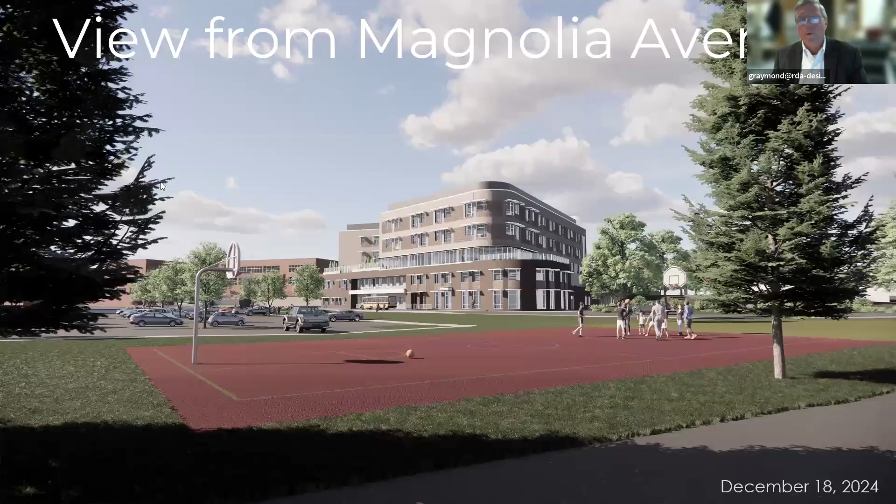What we have spent the last 6 months doing is really working very hard to finalize the design for the building, based on what we'd shown you in the past. But there's an immense amount of detailing that has to be put on paper for the bidders to price out. Since we put the drawings out for final bidding a couple weeks ago, I thought I'd just run you through where we ended up. A lot of it's picking up on what we'd gone through before, but I thought it was a good time to refresh everybody, since it's going to start coming out of the ground at some point soon.

We always start with this view from Magnolia Ave, and we have this new community amenity here that's going to be up on the street with the parking, and Sisson is back here in the background. We have a 5-story school, which we've broken down into a 2-story high community level. It's all school, but this is the double-high cafeteria that connects to the double-high gym and the main lobby. Then we have this divider, treated with transparent glass, which has the media center and the movement rooms, and around the back it has other academic rooms. What we're trying to symbolize is that we're putting a face out to the community, saying these are all important spaces. The 7th and 8th grade are up on these upper 2 floors.

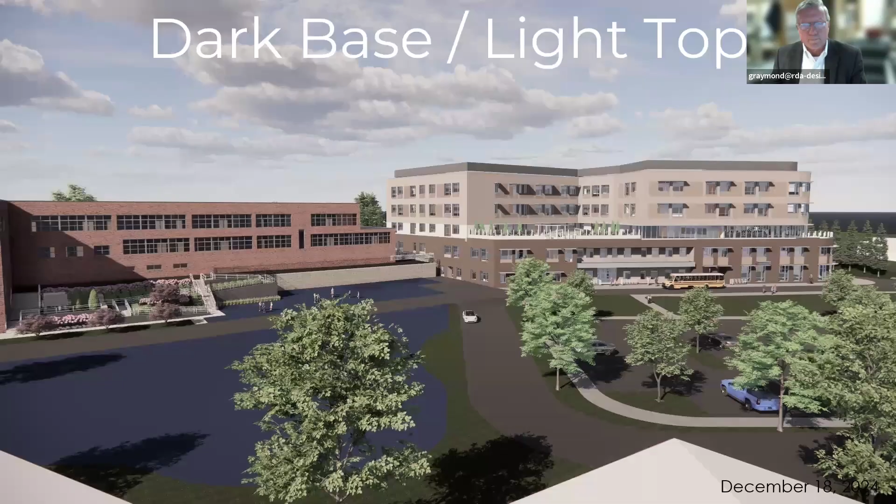We've always envisioned this, and you can't really trust the colors precisely as you're looking at them, because we'll go through and get actual brick samples. Computers are all a little bit tricky, and everyone's screen is a little bit different.

What we've always envisioned is having a solid base, like a big, nice, heavy base, and then a lighter top on it. You can see how it kind of aligns with the 2-story at Sisson, and I don't feel like it's too overwhelming, especially from this view.

You'll see later, I don't know if we've talked about it in the past, but this is where we had that media center, and they'll have a wonderful view out to Flax Pond.

Then we have those movement studios, where my cursor is circling, connected to this outdoor space we've created. We didn't have program space, we had a big roof area, so we've been talking about and labeling this the learning deck, quote unquote. There's a nice connection between the movement studio, where physical activities like dance or other learning activities can take place outdoors in good weather.

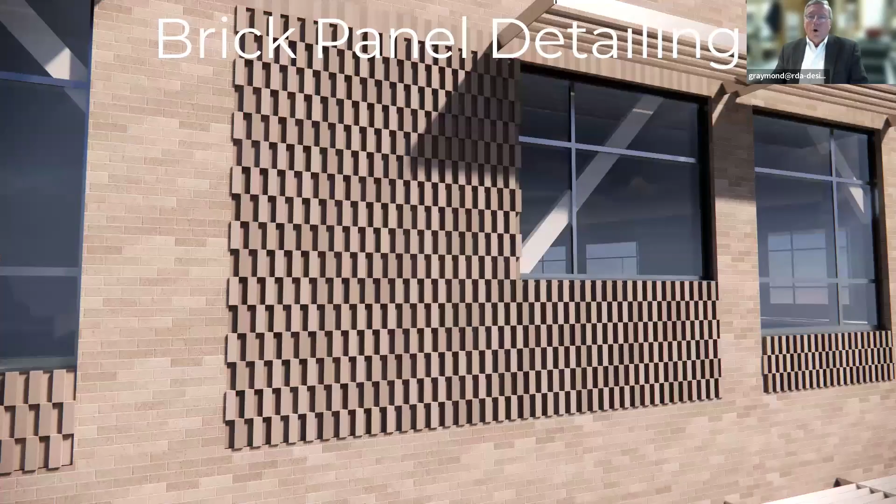I guess I'll skip back and forth, but one of the things we want to do is break down a vast expanse of brick and get some patterning. It looks very subtle here, and depending what bricks we end up selecting, which we'll go through with you, we've taken areas of the building and created some brick patterning that'll bring some shadow and some subtle breakdown.

In this slide we've shown everything the same color, but because these bricks are staggered in and out as they're stacked, there's actually shadow lines that start to appear. Even if they are the same color, it'll start to break down the facade into various panels.

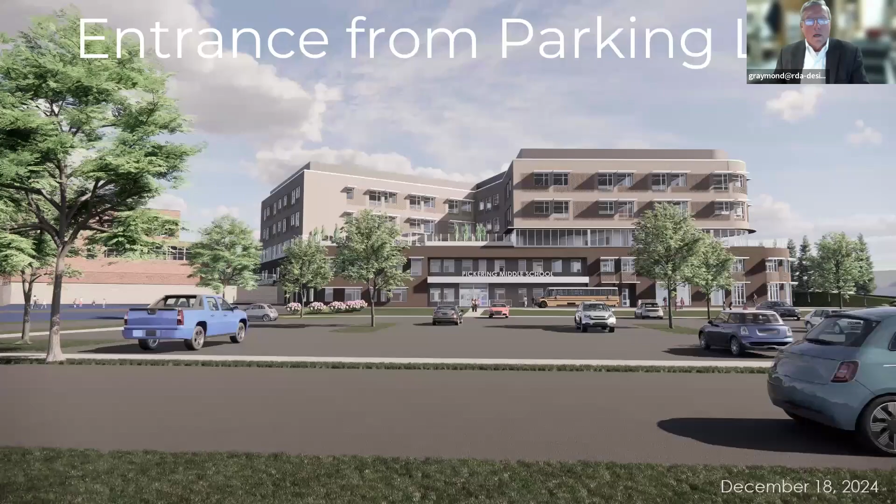Getting a little bit closer, this is the view if you went around, parked, and then the front entrance has a nice canopy that tells people where the entry is. We have some nice big lettering on the school like we do at Thurgood Marshall. In this case it's kind of freestanding, all secured obviously on top of the canopy.

With the learning deck we have some plantings, some planters, and this whole area up here is glass wind guards. The idea is that if you're outside, you're elevated up. If you're in that media center, like I said before, everyone's going to have a real nice view. These are all community spaces, not dedicated to one grade level, everyone's going to have a nice view out to or over Flax Pond.

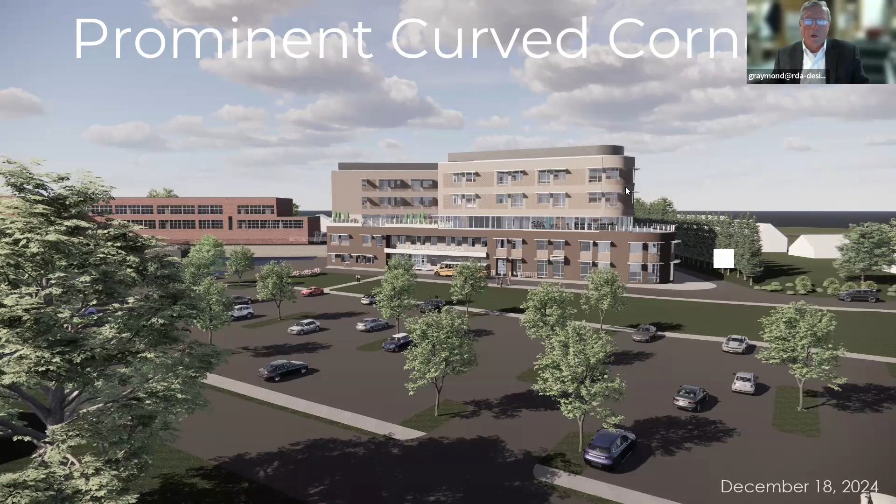We didn't want to bring these floors to a sharp point because it's not an efficient use of the square footage inside, but it's also kind of harsh, and we wanted to soften the building as it went around the corner. So we've picked up on the idea of not only these cores being different colors, but also picking up on the idea of curves, and I'll show you that as we go through.

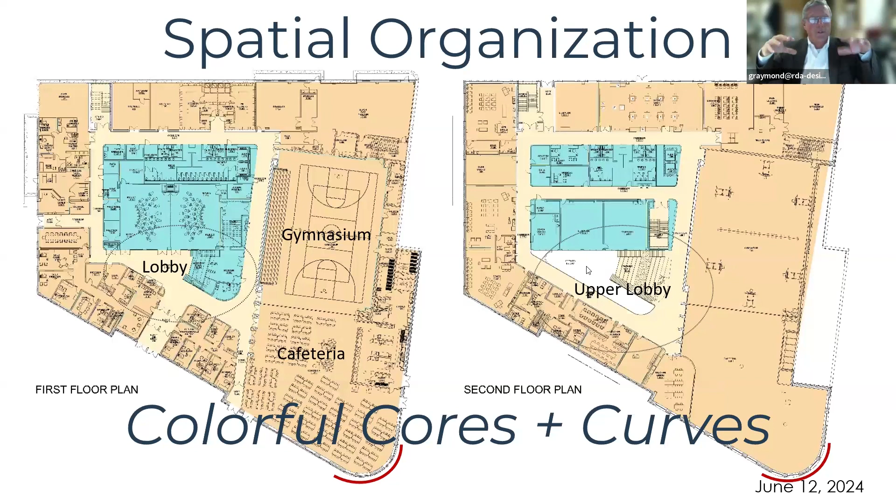So on the first floor plan, when you come in that front entrance, the administrative area controls it. There's that, and then we have this 2-story high lobby. Because it is an interior space for the music rooms and some of these classrooms on the second floor, we have a sizable skylight, so this lobby is going to be flooded with nice natural light.

There's also this connection we've been calling a learning stair. It's a stairway connection up to the second level, but it's also tiered seating, so activities can take place down here, whether it's people spilling out from the music room or other academic activities. It's kind of like a lecture hall, but making use of that space in the lobby.

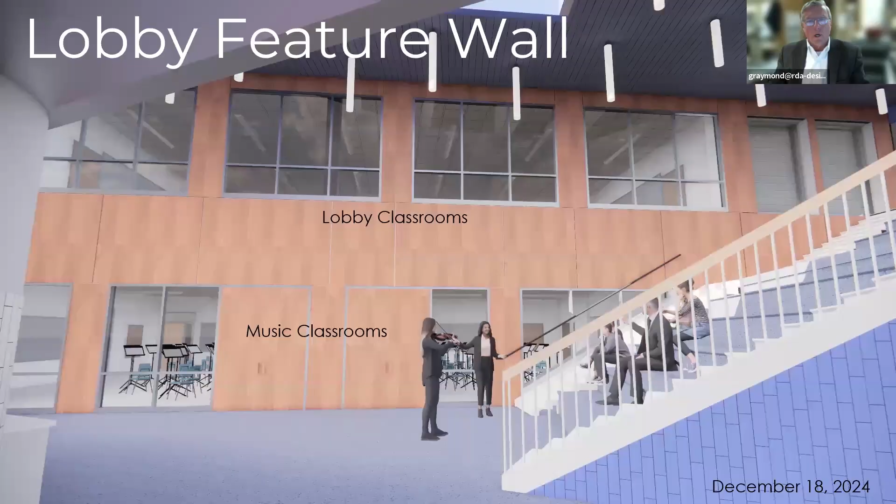This is that prominent feature on the outside, on the end of the building, where the masonry curves around the corner. The idea of taking a curve and turning it into a circle also comes into a lot of what we designed. When you see the cafeteria, a picture of what it might look like, these are all a bunch of circular light fixtures.

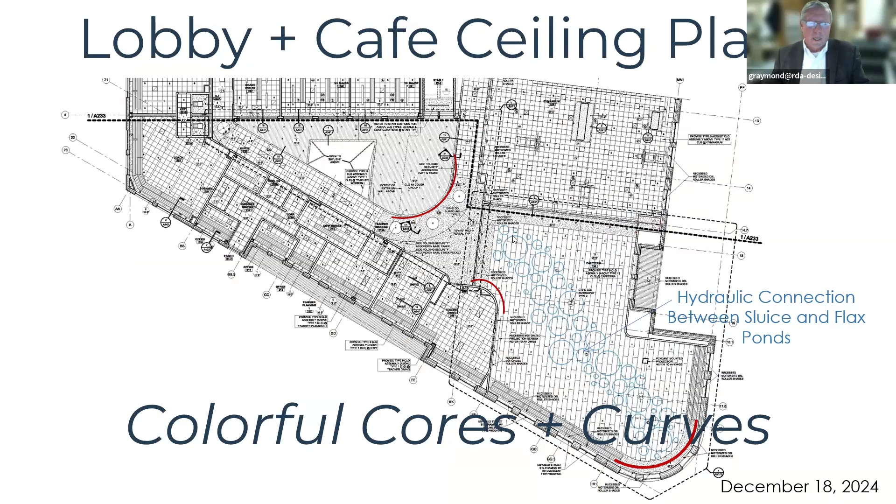This is well before the school was built, but this is kind of the area where we're building right now. So the thought was that we could honor what was going on at the site. We had to have lights anyway, and we wanted to break up this big ceiling, so we'll show you what we did there.

Coming back down into the lobby, this window goes into the administrative office, and the school resource officer has a very good view of what's going on. This is that learning stair. If you go around the corner, these are the doors. They'll always be on hold-opens, so they'll be open unless there's a fire alarm or some sort of emergency, at which point they'd shut automatically. This is how you get down into the cafeteria.

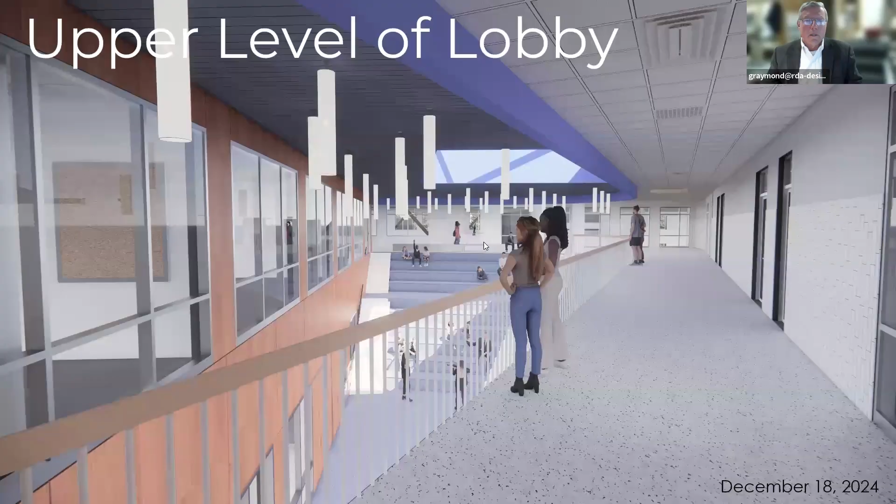If you're upstairs, you'll see we have a bunch of windows on the inside, and some of these windows look down into the cafeteria, and some, as you go around the corner, look down into the gymnasium. If there's ever an activity going on, this learning stair and upper hallway act almost like a balcony, so it's going to be a very lively and very nice space.

You can see here, we're starting to use purple to designate, hey, this is part of one of those core areas in the middle of the building, so that if they're all a little bit different color, it'll help people understand where they are in the building.

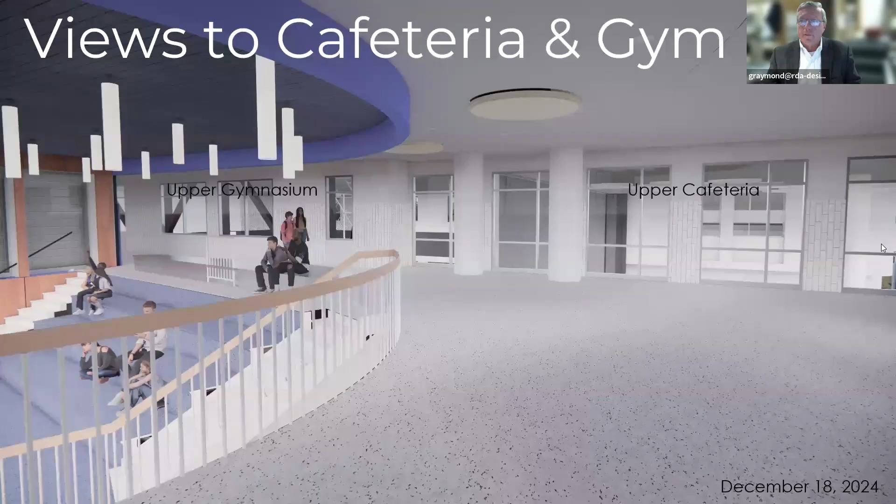So heading down this hallway, you're heading into the sixth grade academic area, but these are those windows that line the hallway. As I said, some of them look down into the cafeteria, some look down into the gym. So this gives you an idea, if you're up on that second level, you'll be able to see what's going on in the cafeteria and feel a sense of connection.

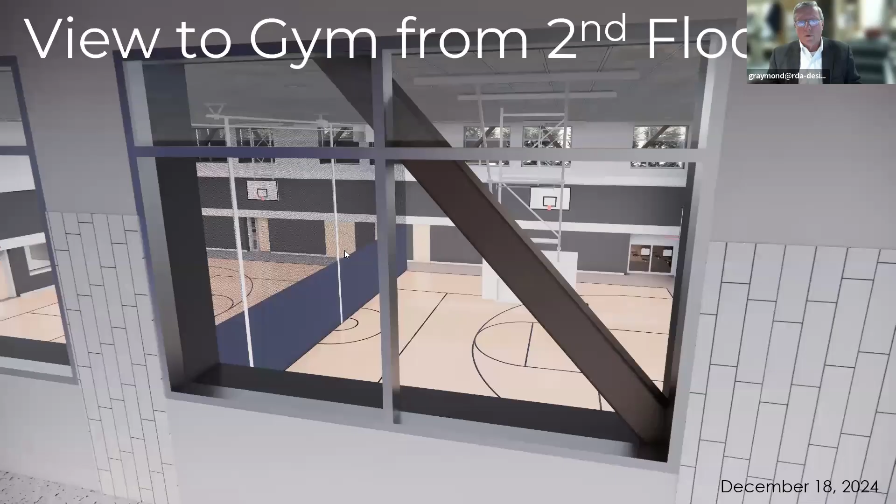Gene, can I interrupt for a moment? Flory's got his hand up. Oh sure, I'm sorry, yes. Gene, just real quick.

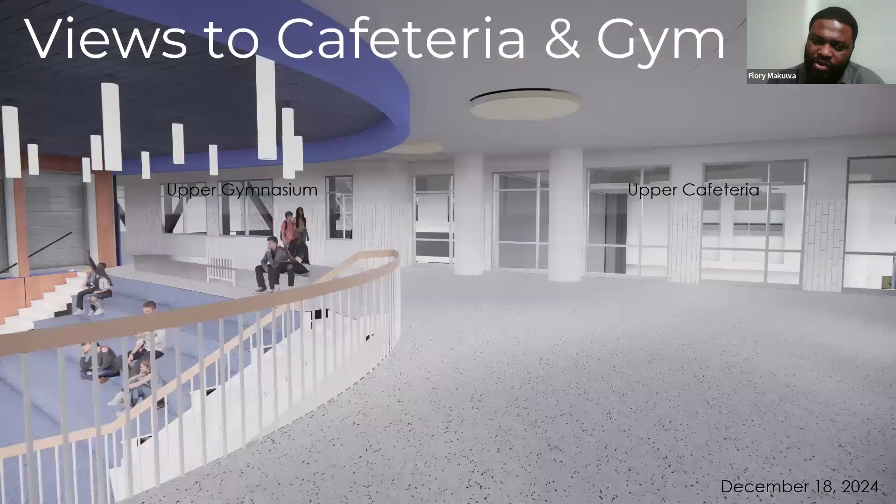Back to the learning stairs - any provision for AV? It can be a great place for performance arts, just from the rendering. Any provision there? Yeah, there's speakers, Flory, and there's the ability to have microphones down on the lower level. Sounds good.

We did think about it, not very long, because it didn't make sense having a projection screen of some sort there. The space is so flooded with natural light, and there really was nowhere to put one. The cafeteria, the gym, and the black box theater all have projection screen ability.

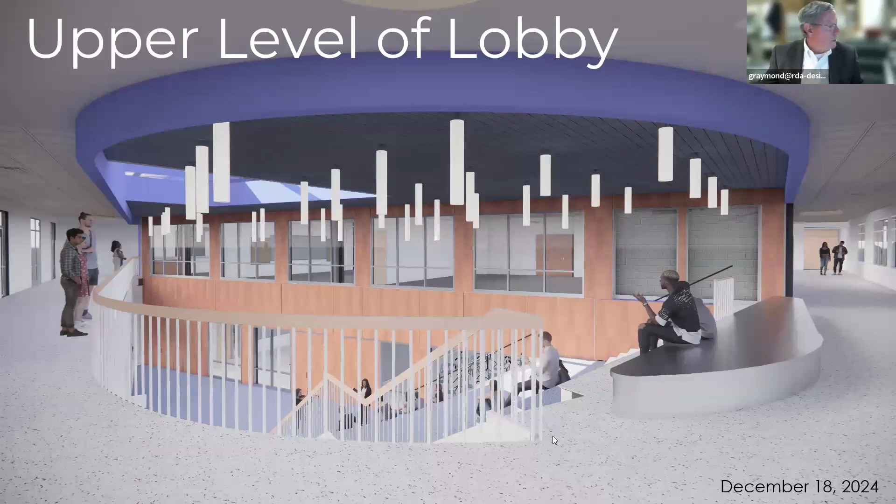And I guess if people want to just interrupt me, I'm so focused on my screen, I'm not watching the Hollywood squares here. Gene, Deb, did you have a question? Yes, can I ask a question?

The railings, what's the height of those railings and the safety for the middle schoolers with those? It's 42 inches, which is what the code requires, so that's 3.5 feet, Deb. And it's the same height as the railings on the bridge at Thurgood Marshall that go between the two wings, if that helps at all. I don't think there's been any issues with those. No, there hasn't. All right, thank you.

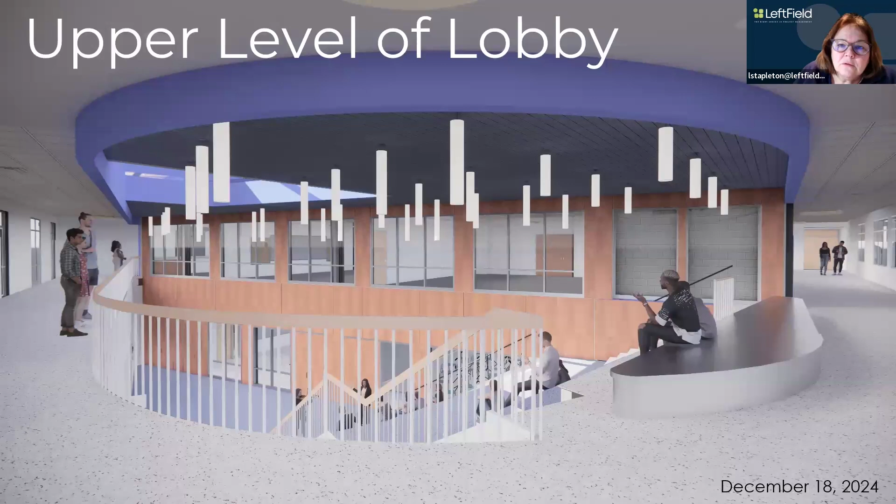Gene, I thought we increased those to 48 inches at Thurgood Marshall. I don't think we did, Lynn, but I'll double check. I'll measure, we'll make sure they get measured and I'll let you know. Because whatever they are, that's what we should do. Yeah, okay, that's not a problem. So Deb, if you do remember to do that, let us know, email us so we can amend the bidding documents.

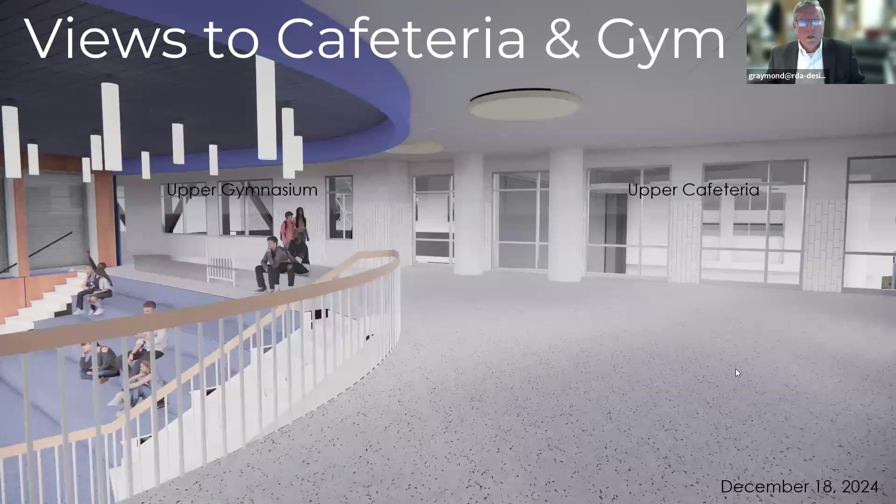Any other questions? I can't see everybody's hands. Craig, just let me know if there are. Will do.

So then, looking a little further down the hallway, there are views down into the gymnasium, and it's not as large as Thurgood Marshall's gym, which was kind of double size, but it's large enough to have a substantial number of bleachers. That's why this school has those two movement studios, because MSBA acknowledged that you need some more physical space, and we just didn't have room on this site for a larger gym with everything else we were doing.

When you get up onto the upper three floors, that's where the learning spaces are. Well, they're all learning spaces, but this is where the grade levels are - 6th grade, 7th grade, and the top floor is 8th grade. And when we're talking about these quote unquote colorful cores, we're talking about these areas that are internal to the building and don't have windows like on the outside.

The bathroom core, obviously not an issue, we left that the same color vertically throughout the plan. But then, this happens to be the audio visual studio, and this happens to be a staff area and extended learning space and the elevator core. So we are planning to do everything here, whether it's tile, paint, flooring, or ceiling, with a specific color. We've shown green here, and you'll see green in the renderings. But again, we need to come to you with our thoughts when we actually get all the materials from the various contractors and have our palette.

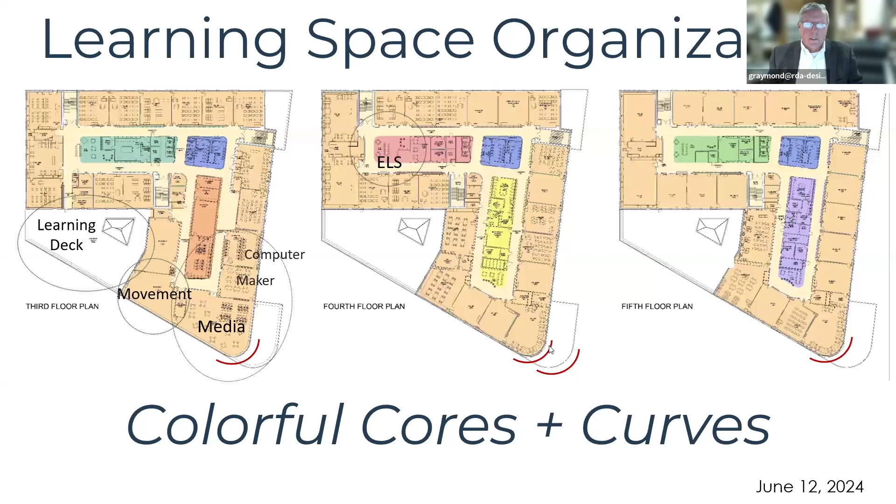But again, the little smiley faces are just trying to make some connections between all the walls on these colorful cores, which are curved. We're curving around here, and we have a lot of curves in the plan. It's all done with narrow vertical tile so we can go around these corners and still have it flow very smoothly.

Gene, are those walls solid on the elevation for the classrooms? Oh, you have glass partition up top. We have a regular door with a side light. Then we have a movable glass wall here, and a pair of doors here that'll open up. The idea was, based on other middle schools we had gone to with folks, that activities...

Each team is 4 teachers: a science teacher, and then 3 others for English, social studies, and math. So call this a team, and each team has the ability to have 2 classrooms flow together if they want, or they can keep the door closed. They also have the ability for one of the classrooms, or maybe both, to flow out into this extended learning space.

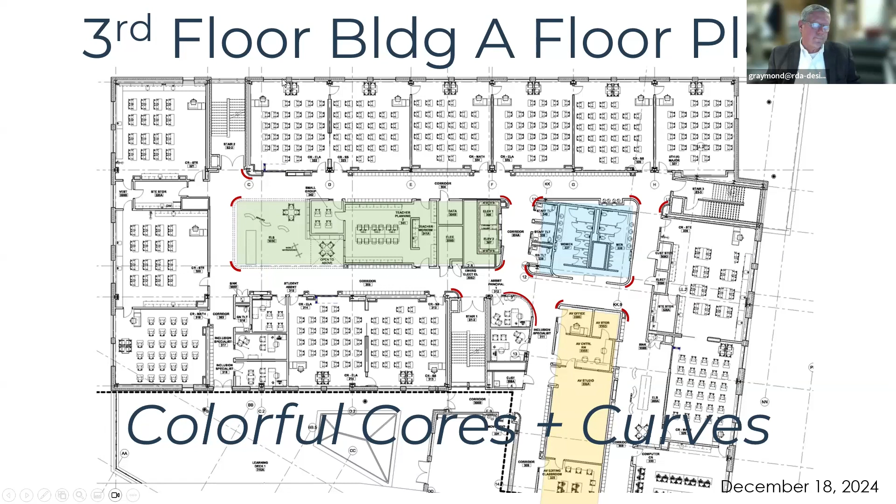So we go from acoustic ceiling tile in a regular rectangular pattern to some drywall ceilings that have a round light fixture in them. This breaks up what otherwise would be a really long corridor into smaller pieces, which we're always trying to do. And it also, I keep coming back to, the way we organized it was around these cores that have color and the curves.

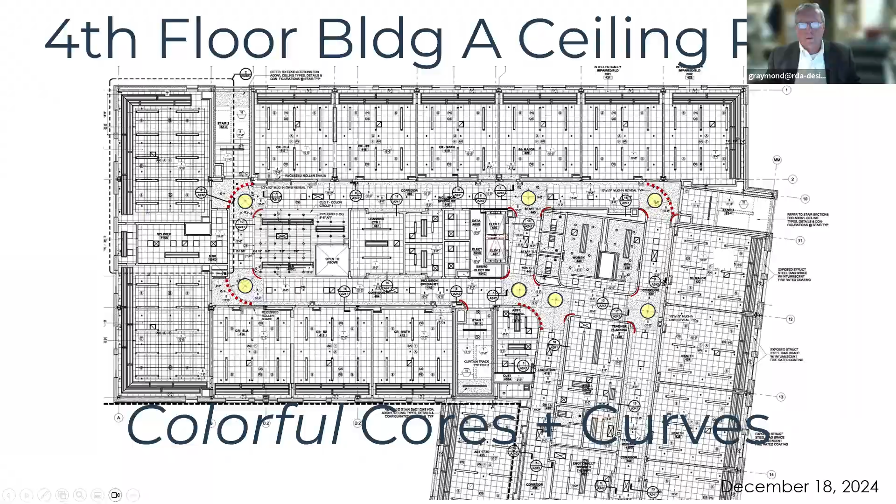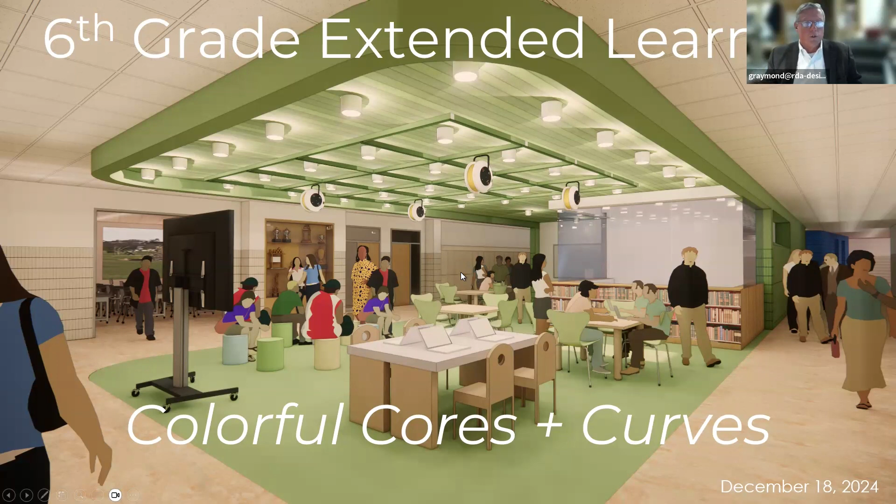And this is an example of where we're showing this core - let's say it turns out to be green in the end. And then down the hall, you can see what we showed as blue, which would be the bathroom core. And if there's lockers in the core, we have them colored, and if there's lockers on the opposite wall, we have them just a nice neutral. And this happens to show one of those wide openings into one of those classrooms I was talking about.

This is just another view in the extended learning space. We've set it up with teaching walls. As I said, there's portable - the school makes use of portable video screens.

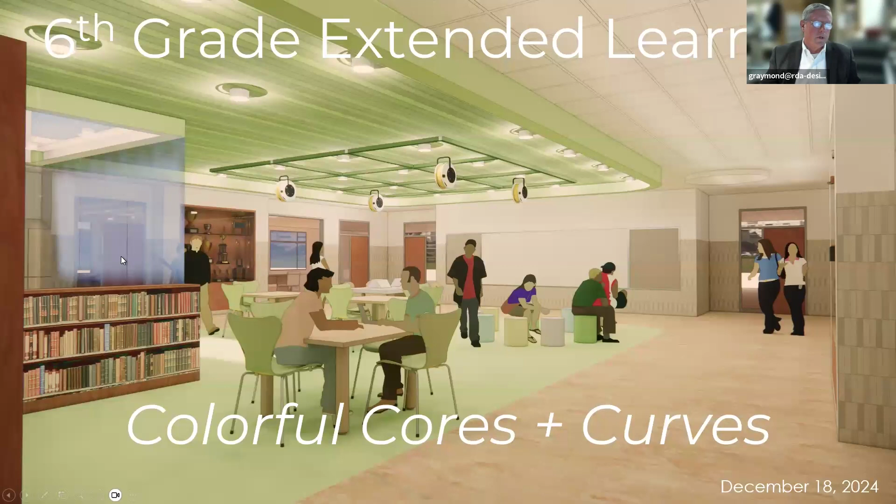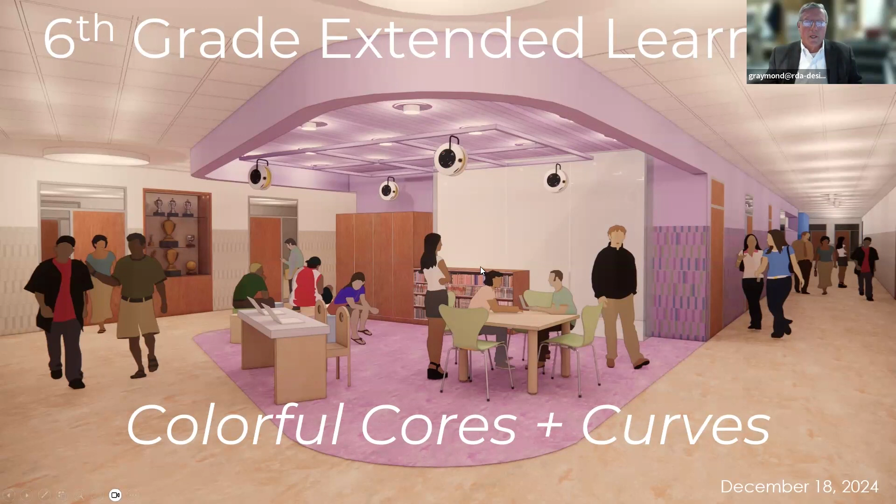And this is showing a little more transparency, but this is one of those light wells that's bringing light down into the middle of the building. And maybe another one of these at the other end is making use of purple. And again, this white is actually glass, so it didn't end up showing too well.

But every team will have display. They'll all have a teaching surface. They'll all have storage for grade level activities that might take place out in these flexible areas.

And this is an example of the vertical tile pattern that we'll have. And because they're narrow, we can segment them around these curved walls without it, very smoothly, I'll just say. And at those intersections, we have these round light fixtures.

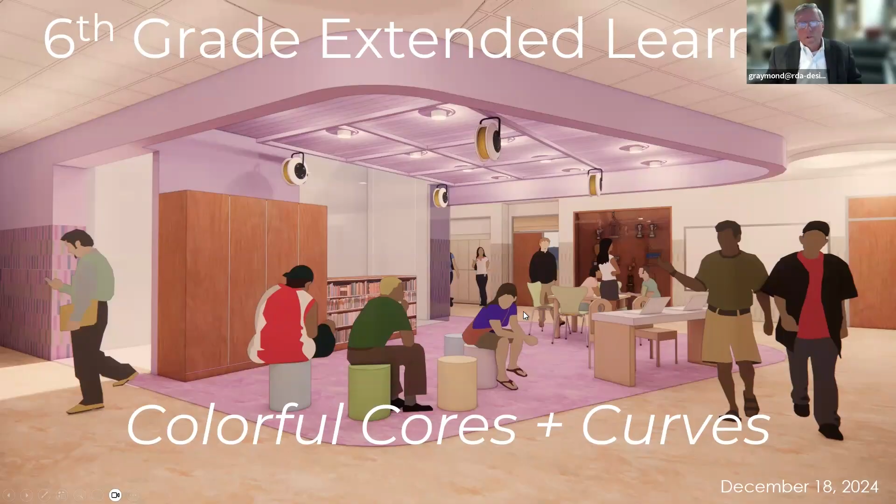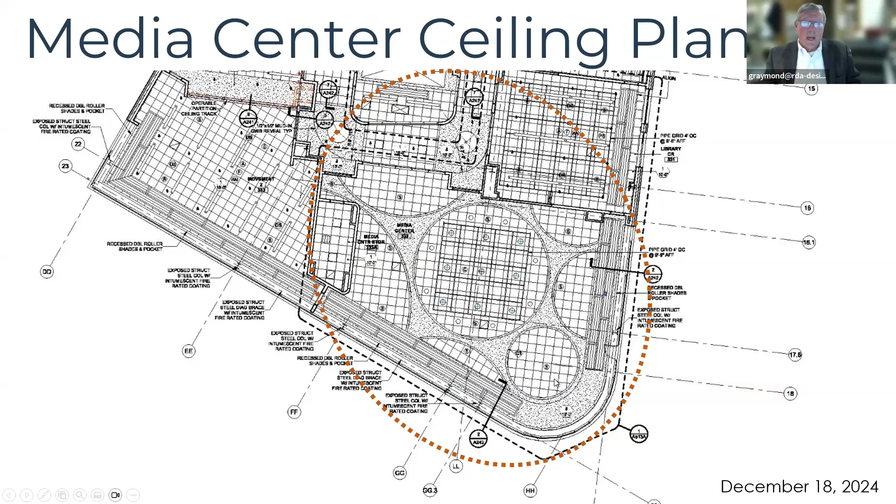So the center of it is a big circle with one of those pipe grids and electrical reels, so it's flexible for maker activities. And then as we go around the perimeter of the room, one other one at the bow is a pure circle, but the others are just kind of broken up.

And this is an image of what we're thinking, which is there's a lot of acoustic ceiling tiles, but it's broken up so that there's gypsum board, and we're also creating these shapes that serve to break up what otherwise would be a big flat pancake.

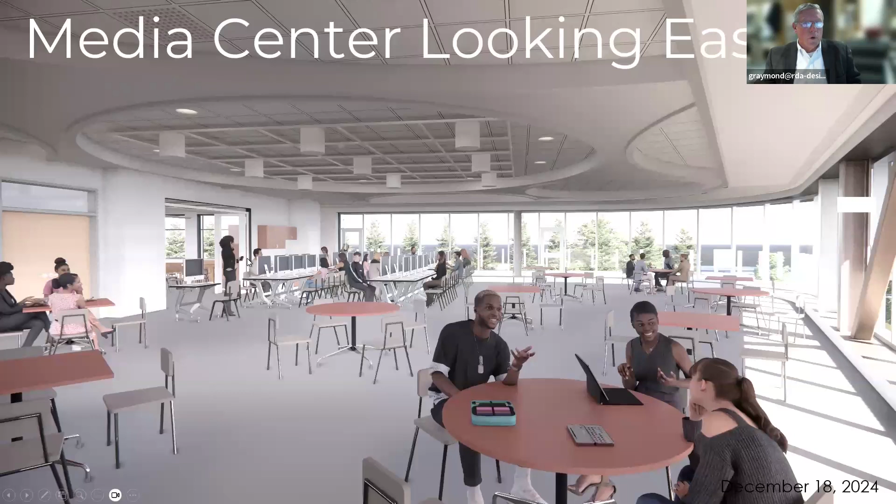Then this is one of those openings - this could be closed or open, but this room over here is that maker lab that connects to the big reading room. And again, the reading room, we're not stuffing it, we're not showing it with a lot of bookcases. It's really going to be a multi-purpose room in the district - we can fit it out any way they want with furnishings.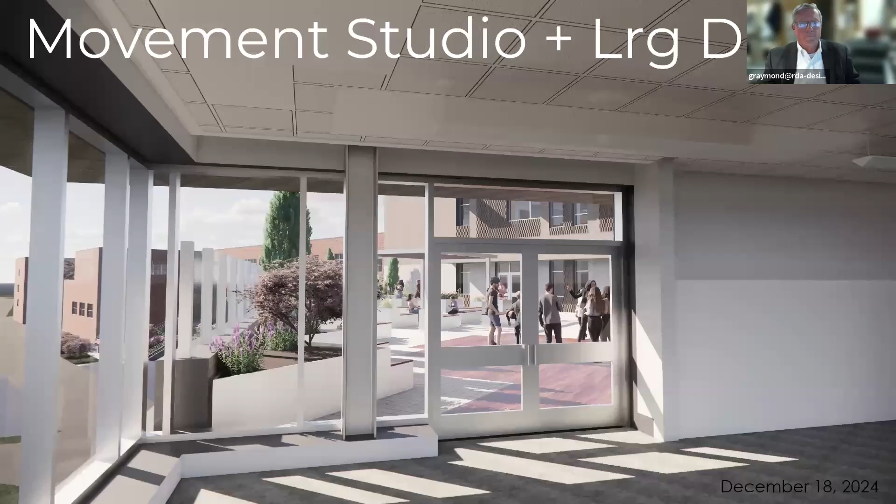And you're not seeing much of the view inside here, but this is inside one of the movement studios. And we just wanted to show you, we've set it up with a big wide door, kind of like car dealers have, so that they can open the two leaves and get a vehicle into their showroom. And outside, the floor levels align. In inclement weather, movement activities could be happening inside, but in nice weather, activities could spill out onto the deck.

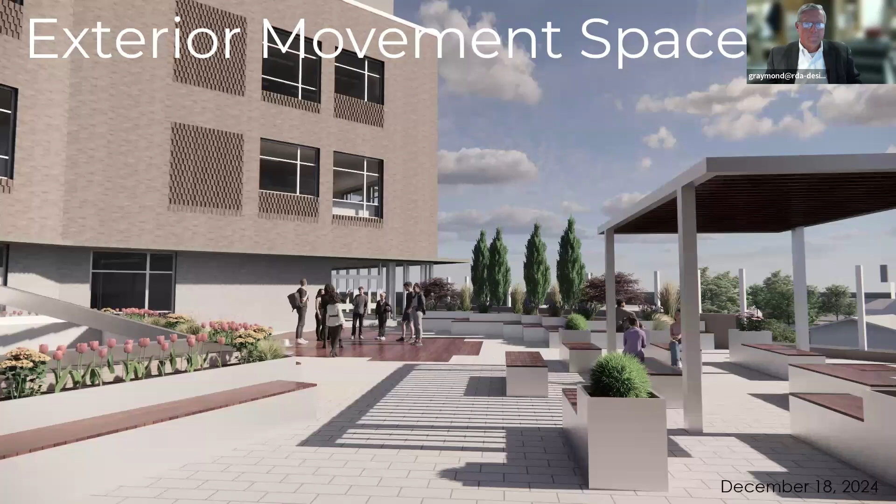There are planters in the plan. And then where you see these posts, there's actually glass panels. So it's a nice windscreen, and it's going to allow that view out over Flax Pond.

This is part of the skylight that's going to bring light down into the lobby. You can kind of get a sense for how we want to break up the facade with different brick panels.

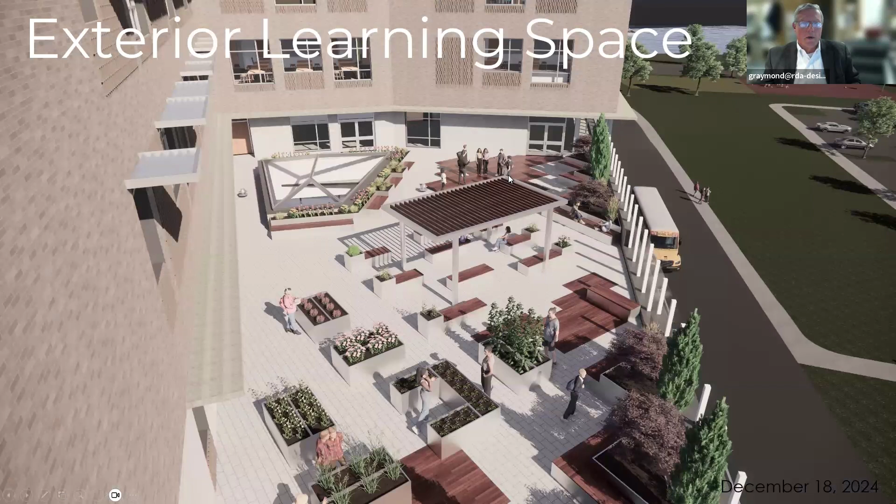This is all concrete pavers, very simple. One of the alternates we're asking Consigli to price up is, instead of having concrete pavers that drop into this grid, to have some hardwood pavers that would drop in. Whether we end up doing that or not will be determined. But there are seats, there are planters, and we have the ability to create various areas using this flooring if we think that's important.

Gene, Tom's got his hand up. Sure. Hey, Tom. Hi, Gene.

Just quick, how high are the glass panels going to be, height wise? Seven feet. There's part of it, Tom, where you can walk up to it, and at that point it's seven feet tall. Then there's other parts where there's a planter box, and that seven foot just keeps going this way, but these glass panels might only be four feet. Okay, you know what I mean? Thank you.

So that's kind of where we ended up, big picture, so far.

Brandon, are you ready to deliver? Yes. If no one has any questions, I can go back to slides or stop sharing and turn it back over to Craig. I'm not seeing any questions. Thank you so much, Gene. That's very exciting. You're welcome.

It's really neat seeing those renderings give a real feel for what the project's going to look like inside and out. Yeah, and they're starting to build it. That's right.

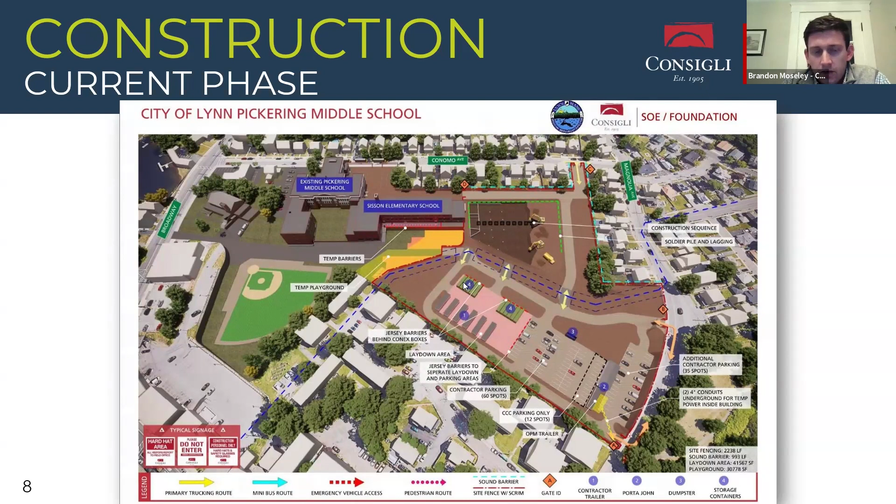You'll see we're still working through some of the site soils as we go through photos, so the laydown area doesn't quite look like this yet, but we're continuing to get there as we haul off different soil characterization categories. This is going to be our next phase as we get deep into the winter. I'll talk about some milestones afterwards, and what you're going to see come the new year - February, March, April, May - as we really get into the swing of things of seeing this building come up out of the ground.

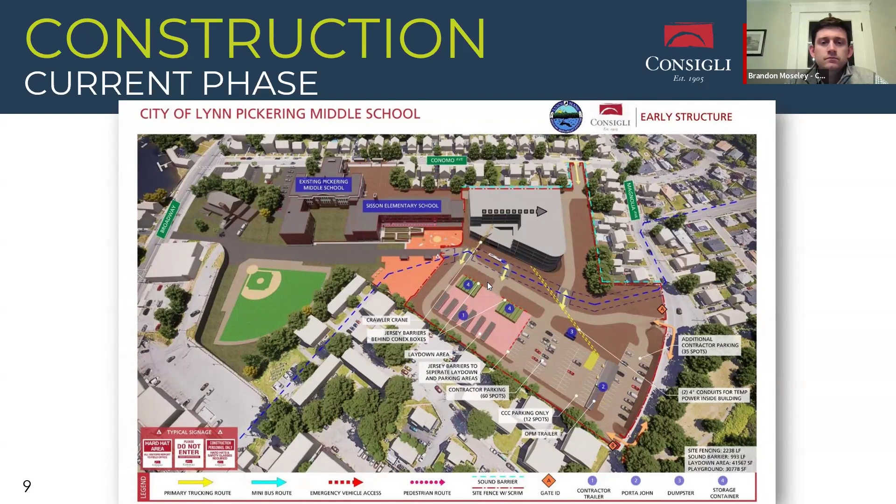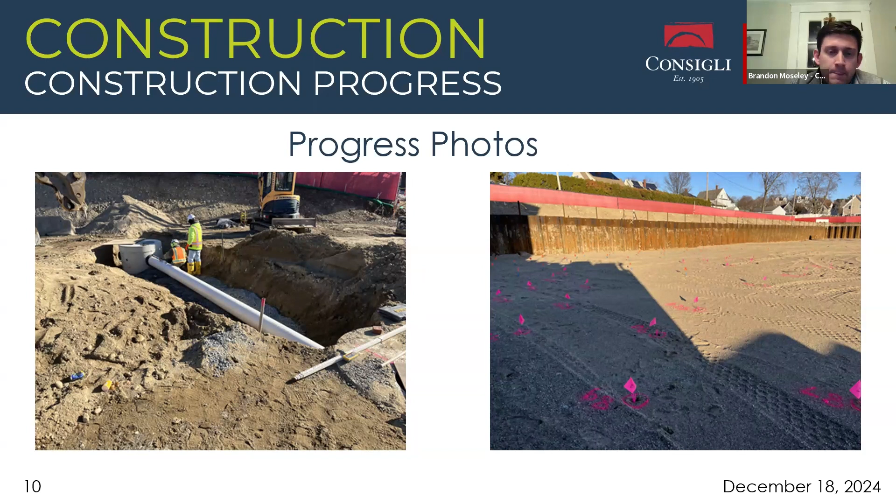On the left was the logistics setup to do that sewer tie-in this past Saturday. That's now complete, and we're able to give back that portion of the temporary playground that we had taken over. You should see a lot less water on the site as well.

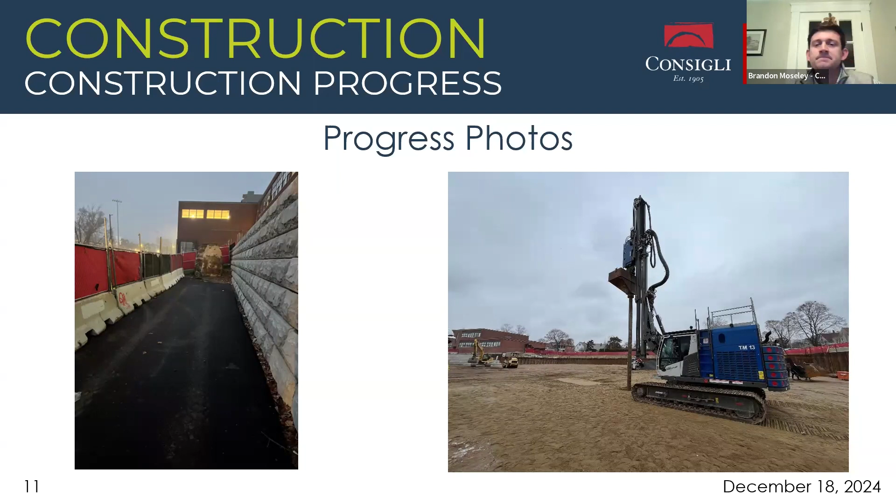I will share my screen and give you a quick run-through of the drone.

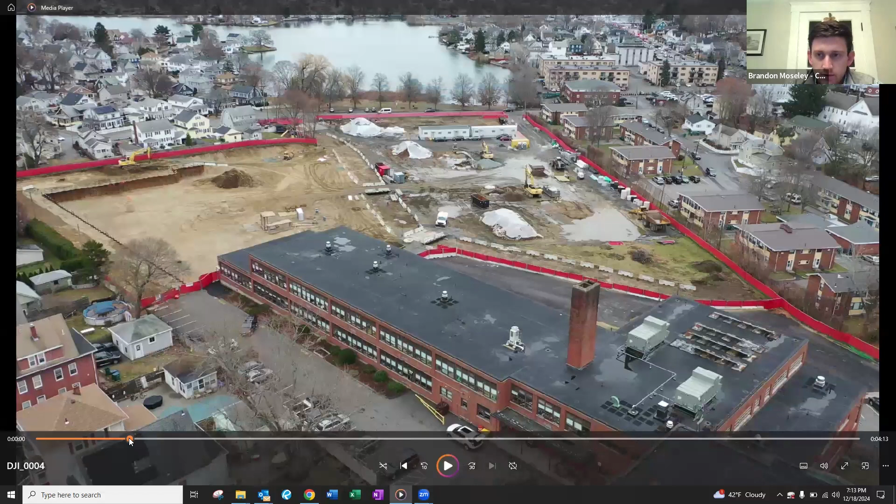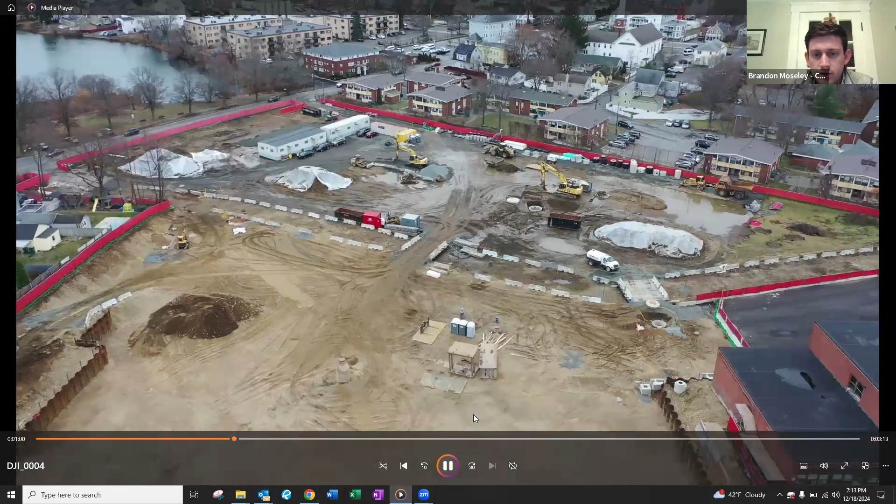This does go back to December 9th, so it's about a week and a half old, so some things have changed. But as you can see from the bird's eye view, we've bottomed out in the excavation for the building. As I said, we've now started - if you've driven past it, you've seen the rig this week installing those rammed aggregate piers, getting ready to start excavating for footings, and then start with concrete after the new year. You'll continue to see piles change as we're able to remove different types of soil off site, managing that within our RAM plan with all the consultants on site.

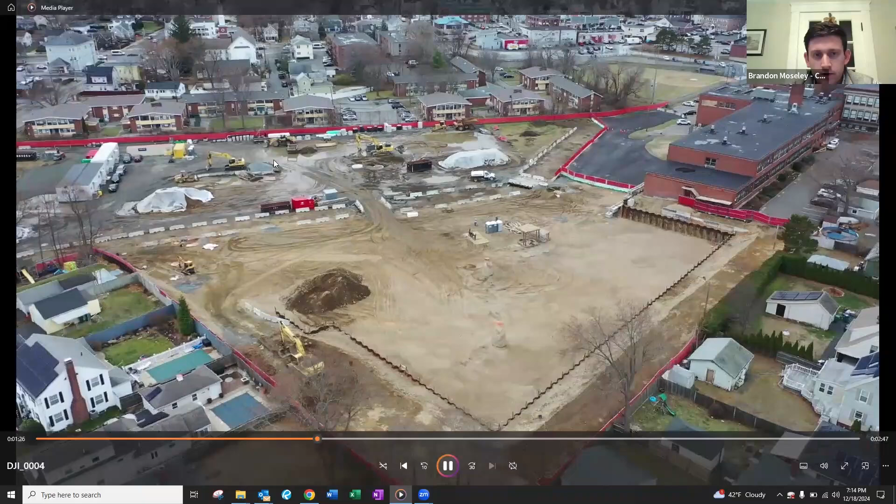We did remove another batch of soil from here beginning this week. And as Lynn alluded to, much of this water, now that we have connection to the existing sewer system, some of it - while we dewater - we're able to get off site with the help of Lynn Water and Sewer, and help mitigate some of that surface ponding we've been dealing with.

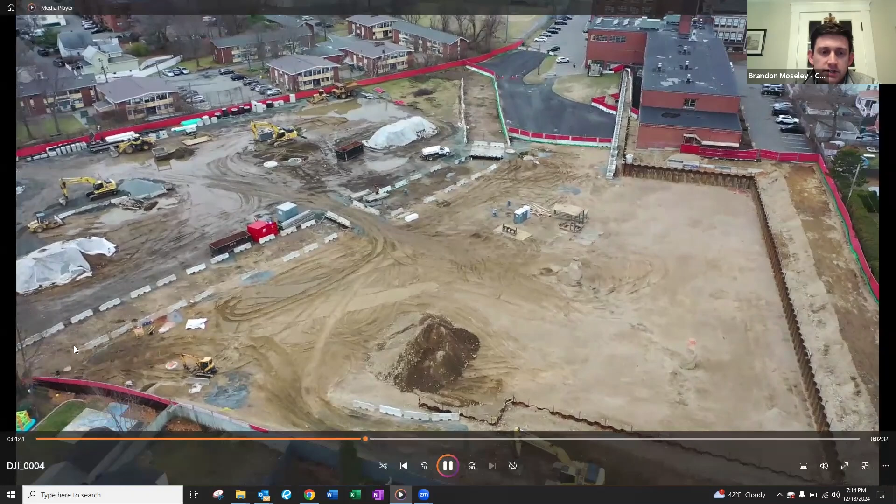We still have our protection of the existing MWRA water line. We will be putting in a third crossing, which will allow for better logistics around that kind of choke point as we start to get deliveries from the laydown area up to the building. When you start to see cranes and lulls and everything, it'll be very key to have full ability to drive around that designated area.

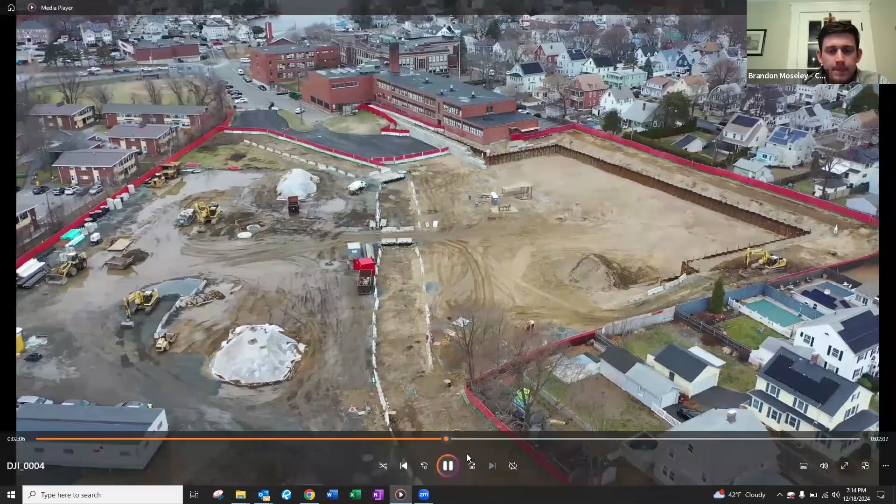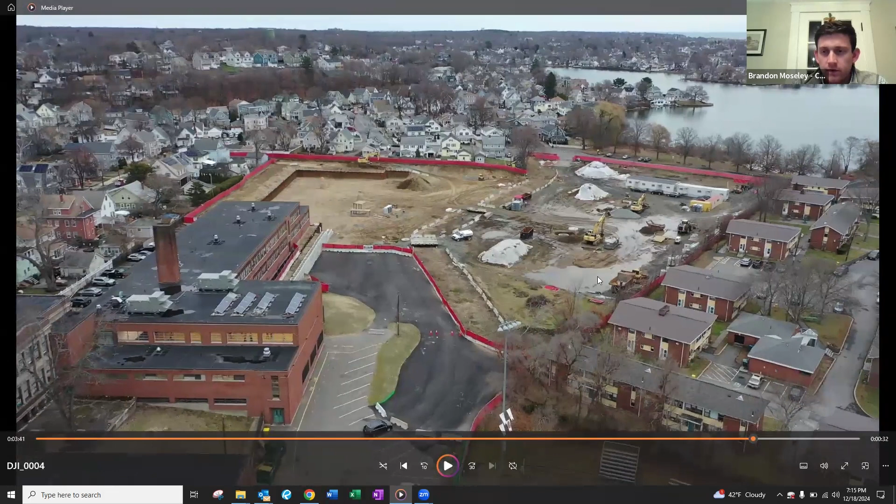As this comes around - zoom out for me - you'll begin to see this area further develop into our temporary laydown and contractor parking. The goal is to get some more gravel laid down and do some temporary paving. It'll help keep the site both clean and safe as we get through the winter and the next year to two years of heavy construction through here.

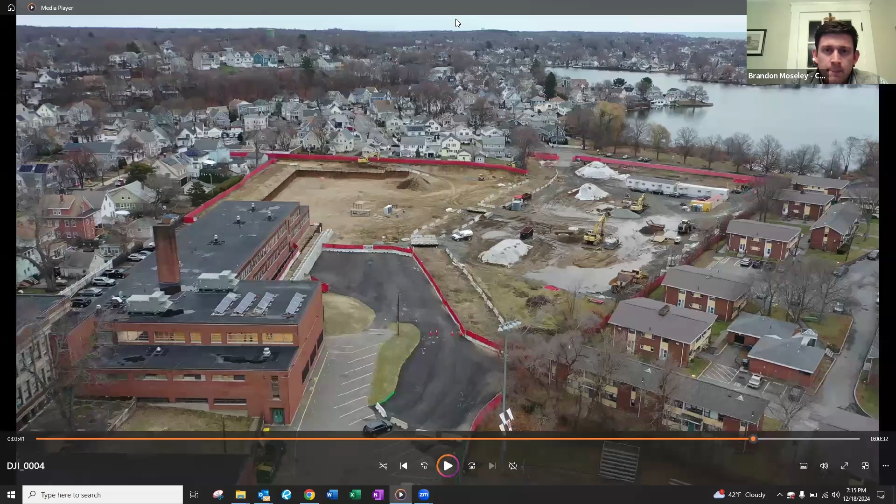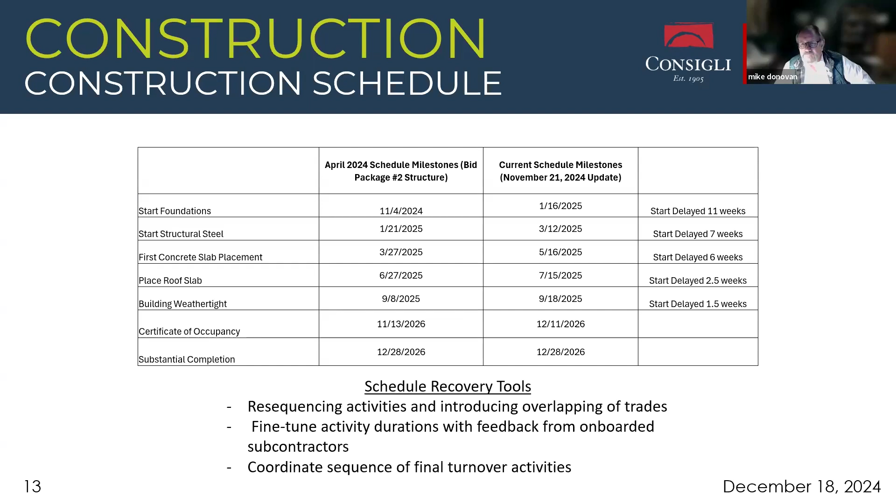Mike Donovan: Brandon, how much time did you figure into your schedule for the coming winter for lost time due to winter conditions? I'd have to double check exactly what those dates were, Mike, as some of the activities have moved from what we were planning. We did plan to have concrete happening through the beginning of the winter. I can get back to you on the exact number of days for weather days. Obviously we're hoping for a mild winter, but we do have plans in place to make sure we can continue to be productive through the winter with the cold temperatures.

Any costs associated with these delays and changes to make up those lost days, Brandon? Right now, with the tools we've been able to implement, we've eaten up float on the project and resequenced some subs. There's no direct cost right now. With each GMP, we do put in as a team some overtime allowances, so that if we as a group see these milestones coming and we need that overtime to get there, we'd make that decision to work the extra overtime. But there's no direct cost right now. I do have a cost analysis on the next slide that actually shows some benefits to the time everyone put in - even though it took longer, we're actually able to get some savings due to the teamwork from the group here.

So Brandon, you don't believe that delaying the start of foundations from November till mid-January will incur additional costs for heating the concrete, blanketing, etc., to keep it versus pouring in November? We carried an allowance knowing that whether it be elevated slabs or foundational elements, we'd do some sort of concrete activity in the winter, Mike. So although instead of doing slabs earlier and being at the tail end of that winter, now it's really foundations, we do have that winter conditions allowance with the requirements to get through this winter with concrete. I still feel we'll be able to work within the parameters of the allowance we put together.

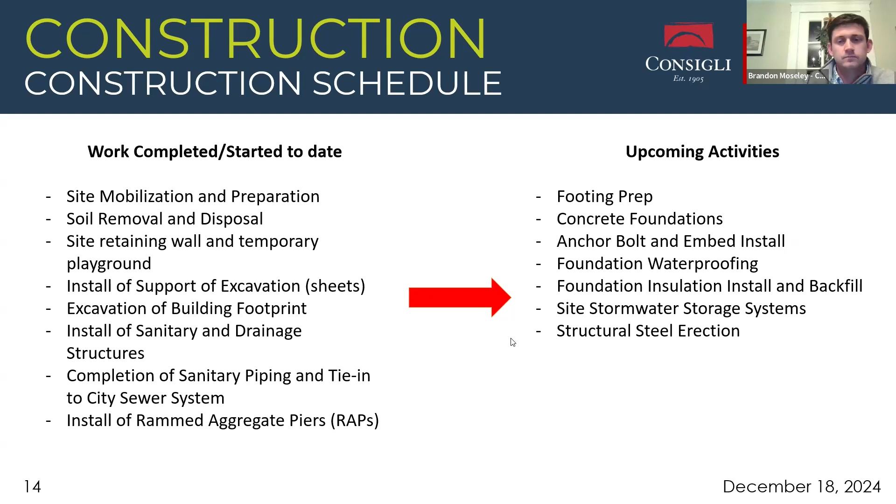We also looked at some cost benefits. For example, the soil testing, characterization, and disposal - we've had some hiccups getting certain types of soil off the site, but as a group we carried a certain soil allowance in the initial GMP. We've been tracking it heavily, and right now we're seeing potential for $500,000 in savings from that allowance, which the city or project can decide to use to fund something else. Anytime we can save money, it's a benefit to everyone.

Geothermal - we benefited from a fantastic buy as we worked through that design this entire summer into the last month or so, saving almost $500,000 based on the last estimate budget.

Ground improvement started a little late due to very in-depth coordination, making sure we're providing the best possible product for the city, given concerns with slab settlement and getting our settlement numbers where they truly need to be so there won't be issues in the future. That did require some additional money funded from an allowance, but we think the extra time put in is going to be much more valuable to the city, and we're able to absorb the extra cost into the GMP.